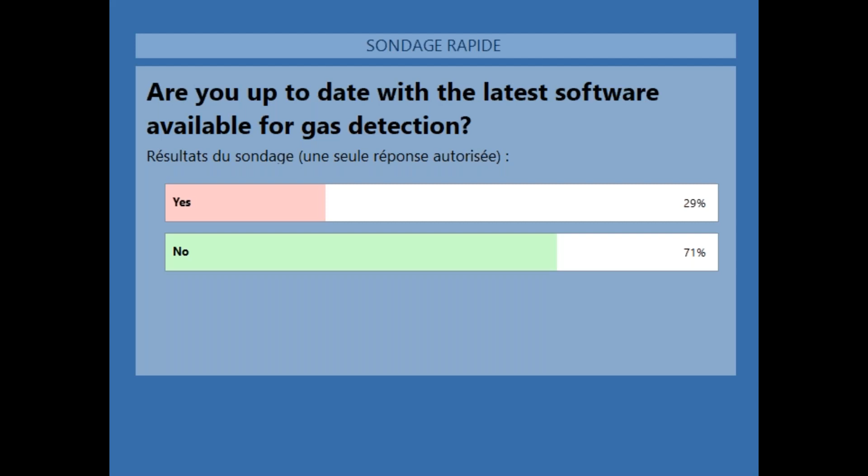A few more seconds. The results are coming. Awesome, very interesting. Almost three-quarters of our audience is not familiar with the latest software available. So you will get the answers today, what's available. Thanks for participating.

So Harry, maybe let's start with how important is gas detection still in industries in 2020? Yeah, the importance is enormous. In the vast majority of industries, workers can be exposed to different contaminants. Gas detection allows us to ensure that normal atmospheric conditions are maintained in the environment in which workers must perform their tasks.

Secondly, to identify the presence of contaminants that cannot be detected by our senses, and also to warn us in case of danger. We could summarize it two different ways: we're concerned mostly with safety and occupational hygiene.

We will see later in this webinar with Matt and Tim the significant evolution in gas detection and in technology. If what surrounds gas detection was not important, it would have stagnated, it would have stood still. On the contrary, we're seeing that this is really not the case. It's really become quite evolved, and something we should all be aware of.

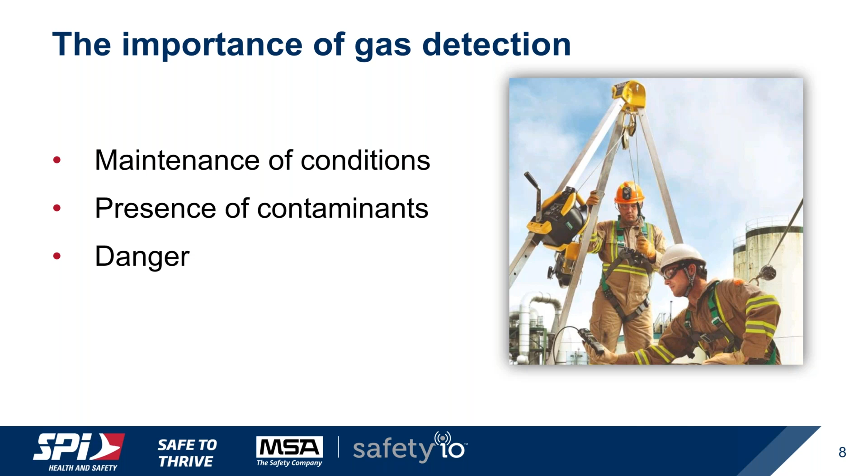On the screen, you can see four of several possible situations where gas detection is used to ensure safety when entering a confined space, which is my expertise, my world. In a specific place where you want to accomplish a task, for example welders or people working in specific areas, you may want to perform gas detection before going into those areas. A hazardous work area where there may be several workers, and you want to protect the other workers as well.

And it's also used to detect leaks. There are many applications where leak detection becomes very important. What I especially want to point out on this slide is that the people who prepare, handle, use, or wear gas detectors must have the necessary qualifications.

You raise a good question here, Harry. According to you, gentlemen, what are the necessary qualifications for the personnel who must use or handle the equipment?

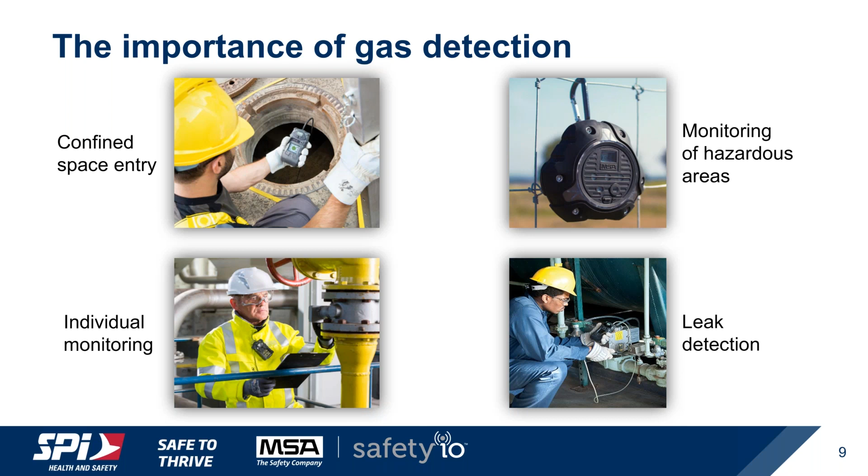But before you go there, we do have another interactive question. I want to know if you, our audience, believe that you have the necessary knowledge to carry out the sampling and correctly interpret the results obtained. We'll give you a few seconds. Very easy answer: yes, no, or I'm not sure.

We'll see the results, it's always interesting. A few more seconds, don't be shy. Yes, no, or I'm not sure.

So, yeah, almost our entire audience is either not sure or not confident they have the necessary knowledge. Glad you're here with us today. So I'll ask you the question again in terms of training, Harry.

When it comes to training, we're talking usually about two different types of users, and therefore two different types of training. First, technical training is mainly applied to people who need to calibrate, verify, modify alarms, repair, or maintain devices. We all want to entrust these tasks to competent staff. This training is often delivered by MSA directly according to specific training programs.

Secondly, applied training mainly targets other types of skills. People who need to use a gas detector to identify, assess, and control hazards should also be qualified. Organizations invest a lot in equipment, but little in the qualifications of the personnel who carry out the testing. So we need to develop the people who actually have to use them, because they want to be able to interpret these numbers and readings.

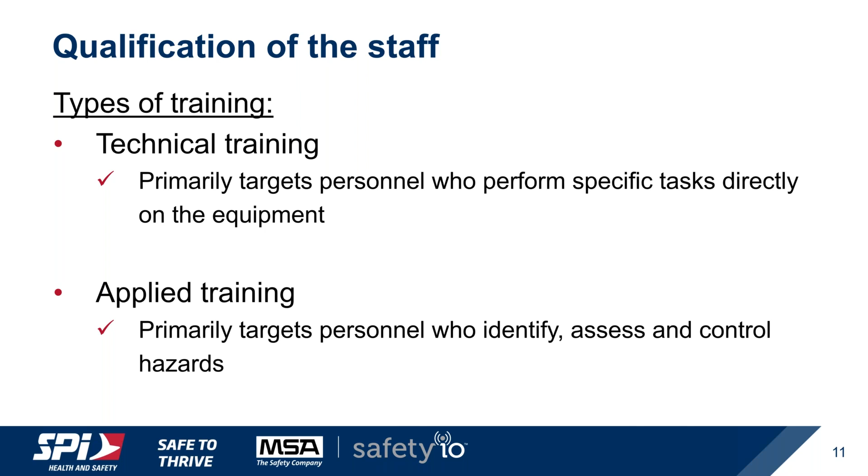So in terms of technical training, Matt, you'll explain what MSA is offering.

Yeah, absolutely. As Harry was referring to, we have competent user training, sometimes called RITE training, designed specifically for the folks who are going to take care of the devices, the detectors, and ensure that they're ready to work.

So what falls into that umbrella? You have bump testing and calibrating the detector, understanding the readings on the actual face of the detector, interpreting the information around the dates that come from the detector and the sensors. What are the different alarm states they might encounter, both around the sensors picking up background gases, as well as other types of things that could drive alarms on the instrument. All of that bundled in with diagnoses, taking apart, reassembling, changing out sensors and displays, all the things you'd want your technical personnel to understand about the detector itself.

And paired with that, we have a component that ties in the software tools they can use to help keep an eye on those things so they won't be in the dark. As those devices are tested, maybe by the folks using them in the field through their calibration stands, they can see that automatically and be more proactive in managing those assets.

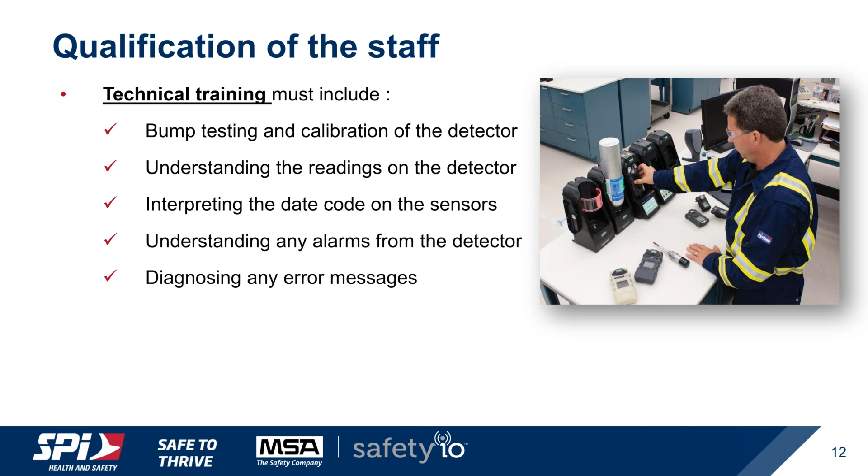And just so you know, at SPI we are an authorized service provider for MSA's product. So we do diagnostics and repairs, calibration, rentals for any gas detectors. In terms of MSA, we're also the authorized provider for the warranty service. So if you need any help or you're unsure, we have a whole department, and that service is provided across Canada. Don't hesitate to reach out.

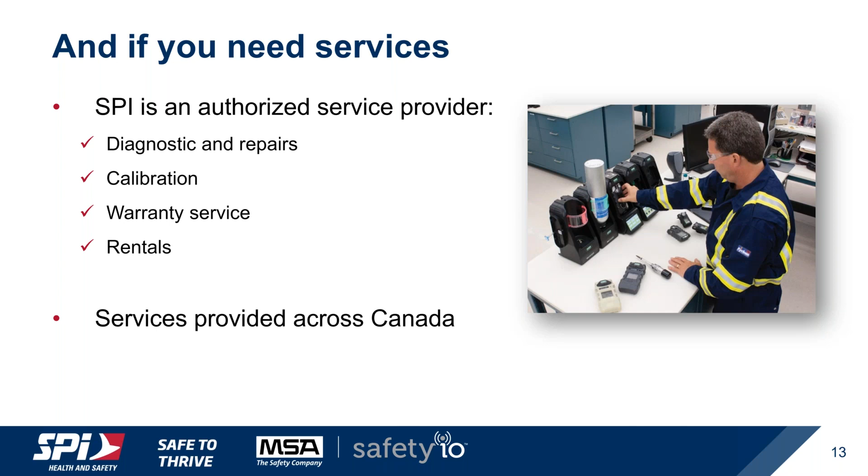So going back to the applied training, Harry, SPI does training as well. Oh yes, we certainly do. From our point of view, the training is essential, and it's aimed at the customers who use the gas detectors. Although it's essential, this training isn't limited to simply knowing the operation, characteristics, and particulars of the instruments used, and whether it's suitable for the gases one wishes to test.

Such as the response time, the time it takes for the instrument to display a correct reading, which we often refer to as the T90. This time is increased if I use a pump with a certain length of tubing, so we're not just waiting 30 seconds - we may have to wait a little more before we have a stable reading.

What is the range of temperature the detector can be used in when you're working in the middle of winter, like in an industrial or municipal situation? There may be some days you just can't use a detector outside.

And it touches on other aspects as well - in particular, the knowledge of atmospheric hazards, understanding the environment to be tested or evaluated, choosing the right devices according to the environment to be sampled is very, very important. The appropriate methods of testing, for example working in top access confined spaces where you have different densities of gases to deal with, or when going horizontal where you may have to reach further into a confined space, so you need to be able to test further in as well.

Then there's the interpretation of the results. This is something a lot of people aren't aware of - sometimes we say, well, as long as the detector doesn't alarm, we're safe. It's not the case. Sometimes when we see certain values appear, even if it doesn't go into alarm, we may want to interpret that as a sign of danger. So we want to be able to understand that.

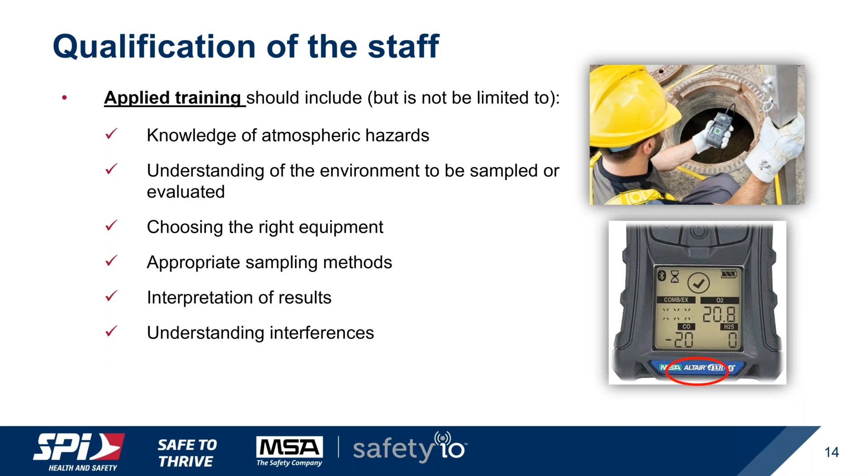That's right. So to facilitate training, MSA offers interesting tools - these are the online simulators. They're also available for some newer models and also for the Galaxy stations, the docking stations. We use these online simulators.

Often users have a fear of using these detectors and devices and navigating the different screens, so they're not too sure how to get through them. They fear maybe altering the device or damaging it. Our consultants and trainers use these online simulators to help our clients, even at a distance.

For example, Fabien was dealing with a client who called in a bit of a panic from all the way up in Fermont in northern Quebec. He was having a challenge with a detector - he needed to be able to bump test and calibrate it, and he was just not getting it done. So with the online simulator, he was able to guide him through it. Within minutes, the guy was able to do it. So yeah, it's a very, very useful tool, this online simulator.

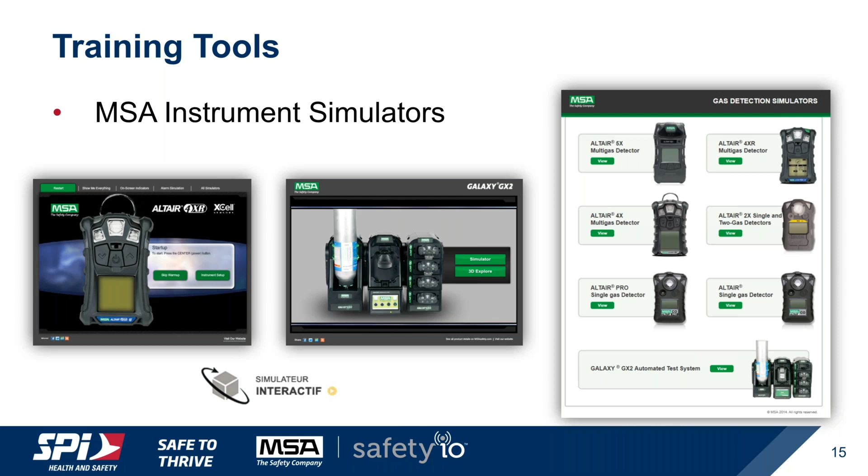Exactly. And finally, the new MSA devices actually do have Bluetooth technology, which opens up a whole new world of possibilities for data control.

Yeah, and beyond the Bluetooth, that's what Tim and Matt are going to talk about as we move on to Industry 4.0. But before we get there, what we're going to be discussing with you, Matt and Tim - correct me if I'm wrong - is you're going to summarize how Industry 4.0 works and basically what are the main challenges for workers' safety in this era. You'll compare it to the evolution of gas detection, as Ari mentioned before, and how the digital transformation and technology is changing workers and industrial safety through the software you're going to be presenting. And obviously how to get started and who to reach out to. So I will let you introduce MSA and Safety IO.

Excellent, thanks. So many of you may know MSA, and I'm sure many of you have yet to be exposed to MSA. MSA is a safety equipment manufacturer that has been around since 1914, and in fact our first big commercial product was co-developed with Thomas Edison in 1914 for the mining industry. MSA has matured considerably since then, and we offer a host of different types of personal protective equipment, as well as infrastructure protection equipment in the gas detection space, as well as head, eye, face, hearing, respiratory, and fall protection. So MSA has been around for a long time in the safety space.

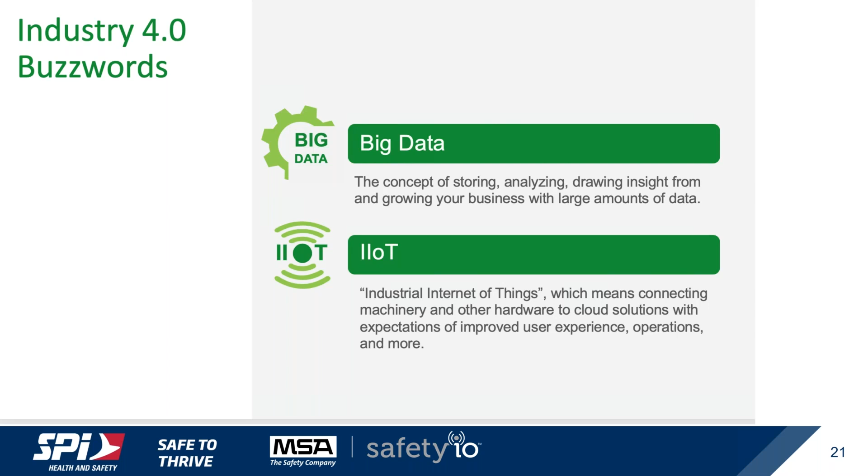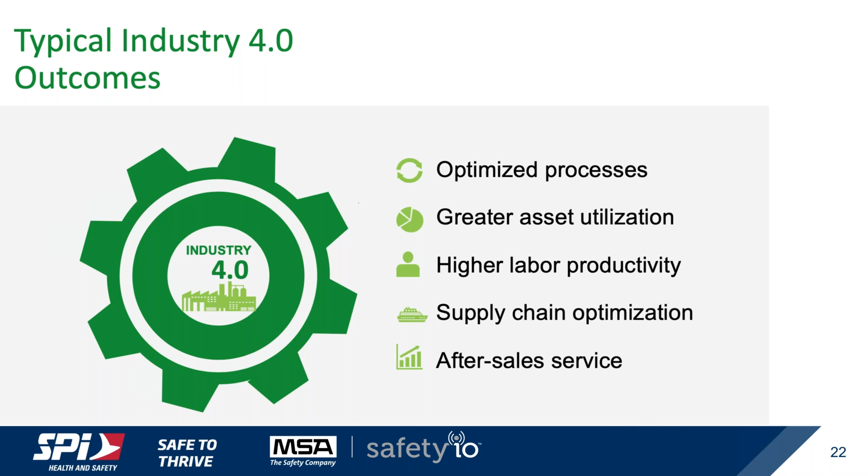So what kind of outcomes is Industry 4.0 providing today, just in general in the industrial space? It's helping companies optimize their processes, better utilize the assets they have, increase labor productivity, optimize their supply chain, and even increase revenue by being able to offer after-sales service. These are most of the common things that we see for any digitalization project today, but improving safety outcomes is starting to gain attention in corporations that have a safety-first culture.

Now, Matt's going to talk a little bit about some of the challenges you may be facing today in your company or in your safety program.

Yeah, thanks, Tim. So, a little bit of a history lesson here. This made me think back to my middle school and high school days in history class, wondering when we would ever use this information. Well, today's the day. If you look back 150 years, the second industrial revolution is when you really saw the introduction of electric power, assembly lines, things like that. At the tail end of that is when the baby boomer generation was really coming to the forefront, being born and growing into their careers.

Now by 19 - yeah, Harry's waving here. Yeah. And in 1970, right on the heels of the baby boomer introduction, you had Gen X, and you also had the third industrial revolution, where you saw the introduction of computers and digital equipment shifting from analog approaches to more digital information. And I am also part of that kind of third industrial revolution in the millennial space, although I'm remiss to admit that sometimes. I am also part of that group. And yes, now, I am too, Matt.

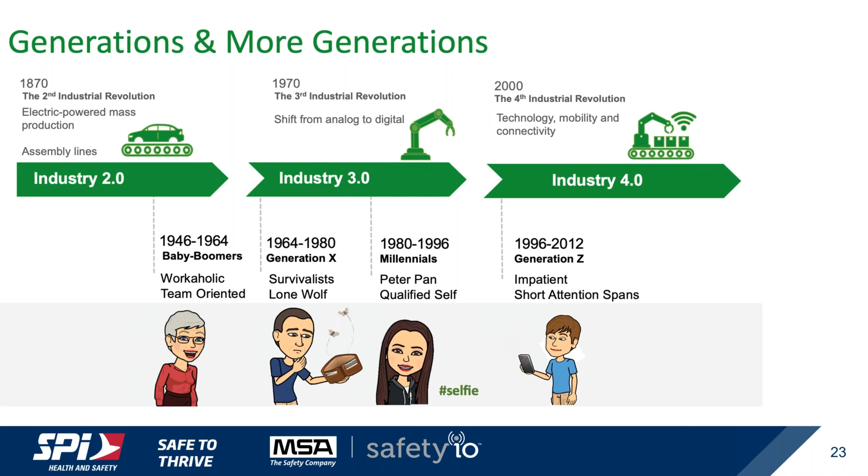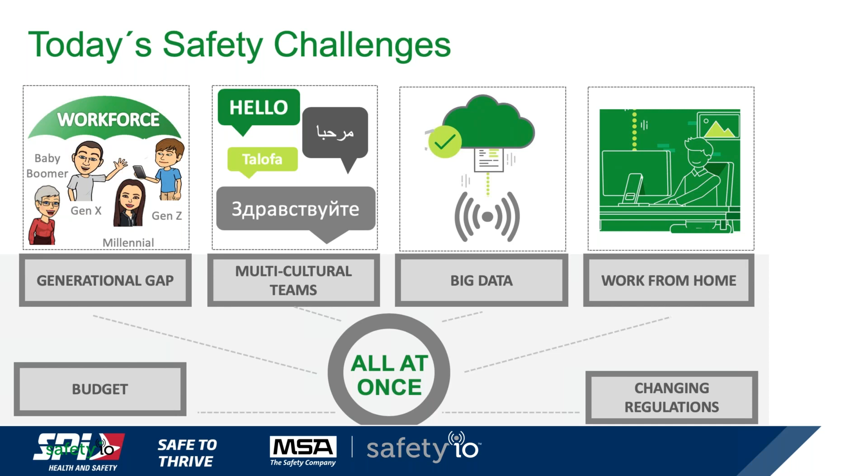So let's expand upon that a little bit more. In addition to the generational gap, what Tim, myself, and the Safety IO team have been learning is that as companies reach around the globe, you have multicultural teams working together. There's an interest in data, even if you're not collecting or organizing it well, there's an interest in acquiring information and figuring out how to put that to work. And a lot of us are faced with a work from home scenario - we were planning to be all together for this webinar, but the pandemic and other situations have limited our ability to do that.

So how do we help people work more effectively from remote locations? With that, I'd like to hand it over to Tim to talk about how we're doing in worker safety. Thanks, Matt.

So how are we doing in worker safety? According to the International Labor Organization, 2.78 million workers die from occupational accidents or work-related diseases, and another 374 million suffer from non-fatal accidents. I don't have to tell you about the impact of these numbers. In addition to the human suffering and loss of life, there's a tremendous economic cost, whether it's absenteeism, lost productivity, poor community relations, or affected stock prices.

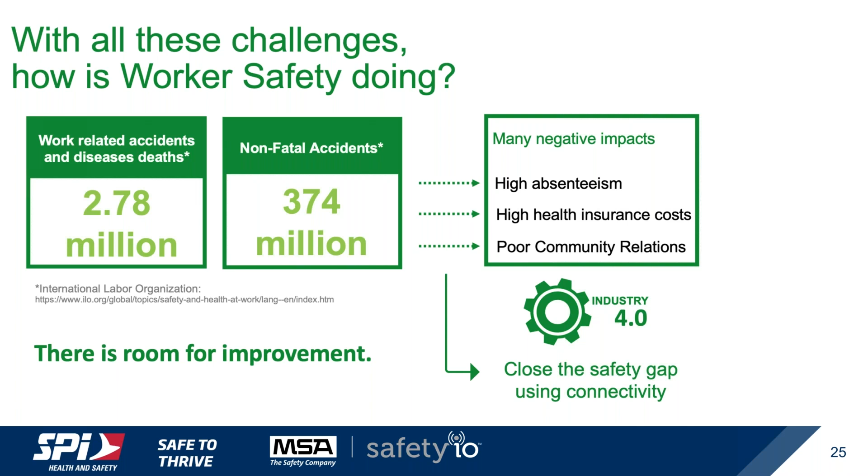Progress has been made in past years in industrial safety, but there's still a lot of room for improvement. As safety professionals, you have to be focused on your biggest safety goal and can't be dependent on clipboards and workers being accountable for themselves necessarily. You're spinning a lot of plates. You need full visibility into worker safety holistically in order to be compliant with safety regulations. Control is key and details do matter.

So that's why you're here today, right? Why learn about Industry 4.0 and why now? Industry 4.0 isn't just about manufacturing efficiencies - it has the potential to improve safety outcomes in your organizations. The insights we're going to get from big data analytics in safety will provide insights to you and to others, and those insights could lead to safety improvements for your workers.

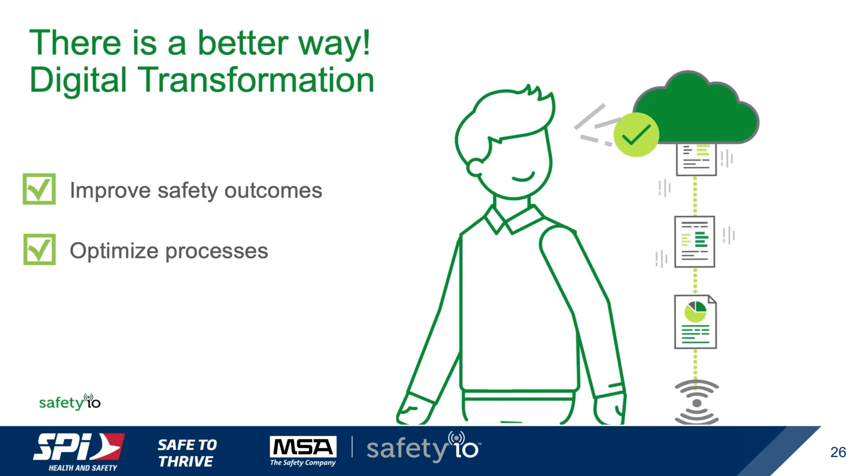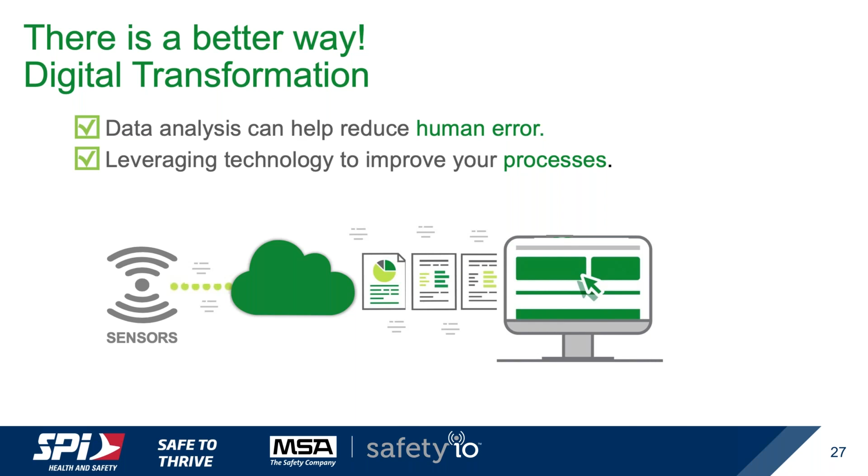So is there a better way to manage these challenges? Yes - we can rely on technology to help us in these spaces. Data analysis can help reduce or eliminate human error and help create a more comprehensive approach to worker safety. Technological advances are really affecting the world in different ways, and when it comes to industries, it's not any different. The insights are going to allow you to improve existing processes and make you more efficient.

Gas detection has also come a long way, and Matt's going to go back and give you another history lesson here in gas detection. Yeah, I'm really putting on my professor hat today, it's a very new interesting place for me. I actually like history now. All right, good.

So as Tim was saying, there are changes happening from a technology and data standpoint all throughout our space. I just wanted to show you how things are progressing and how quickly they're moving along, even just within one kind of niche category in gas detection.

So in the second industrial revolution, you were seeing folks using canaries and other types of winged animals to find hazards before they affected workers down in dangerous places. In the 1920s, MSA launched their first carbon monoxide monitor, and then after that, you started seeing combustible sensors and things like that.

Now, it took until 1950 for the multi-gas detector to come along, which many of us see across the industrial space because they give you so much flexibility and awareness across the four key exposure risks - combustible gases, oxygen, carbon monoxide, and hydrogen sulfide. They became wearable and transitioned from analog to digital during the third industrial revolution, and started integrating logs. So it wasn't just about providing awareness to the person wearing the device, but about what we can learn after an incident or exposure based on what the instrument saw while it was at work.

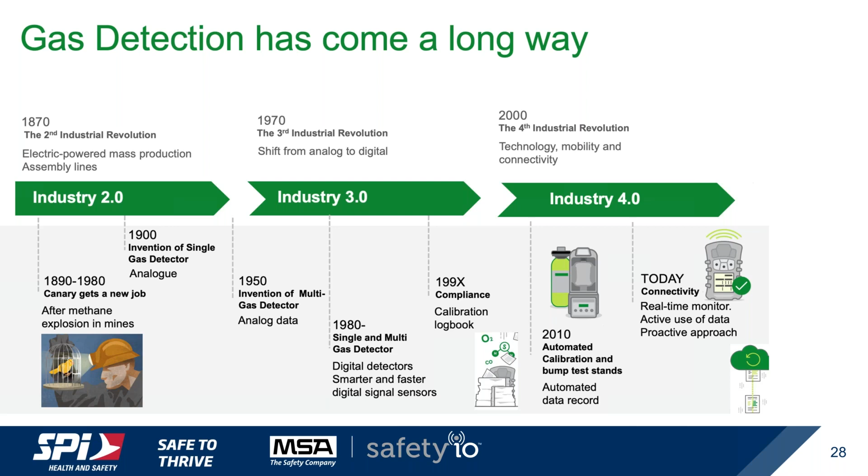So in essence, as Tim has been saying, the devices are becoming smarter, their response time is getting faster, and it's allowing for safer workforces. So progress has certainly been made, but we still believe, based on conversations with people around the world, there's room for improvement.

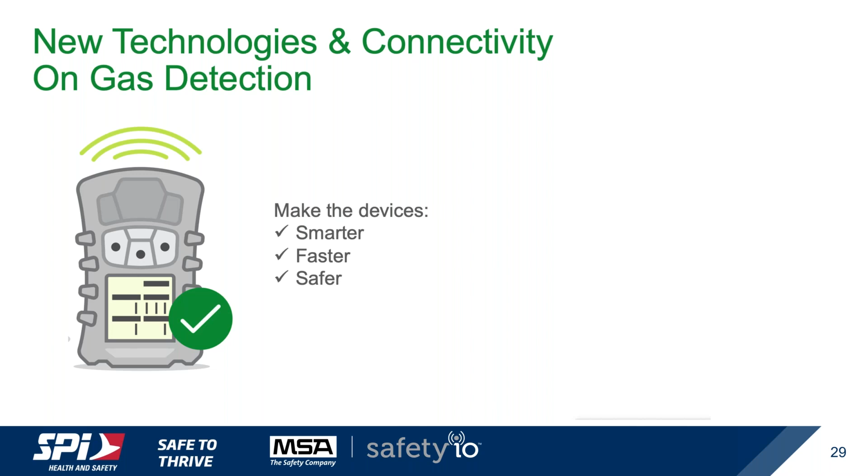Thanks, Matt. What does that journey look like, Tim? Why don't we start off with that? Yeah, so we've given you a lot to think about. We've set the stage, we've talked about a lot of history. Industry 4.0 can be this big nebulous thing, and there's so many different ways you can approach your safety program. So let's dial it back and start the journey. How do you get to where you need to be?

So why does data matter in all of this? When it comes to putting together a compliant safety program, there's really four components here. And I'm going to focus on gas detection because that's where we have a lot of experience, and that's where we're focusing on right now for Industry 4.0.

So the first one: making sure workers have the right protection for their job. Do you know if workers have the right sensors given the gases they're working around? Are you using area monitors in a confined space? How are you even tracking this now? Are you using pen and paper? Are you using spreadsheets? The second one: making sure that equipment is inspected and working properly.

Do you know if your detectors have been bump tested and calibrated? Are all the sensors ready or are they end of life? What about preventative maintenance? If you could be proactive and repair or replace a piece of equipment before it breaks, how much downtime are you going to save?

The third: making sure that the worker is actually using that equipment properly. Are they even turning the detectors on? Are they ignoring gas alarms? Are they pressing the button? Are they turning the detector off when it goes into alarm? Are there sub-alarm exposures happening that you're not even aware of, or that the workers aren't even aware of? And then the fourth piece of compliance is record keeping.

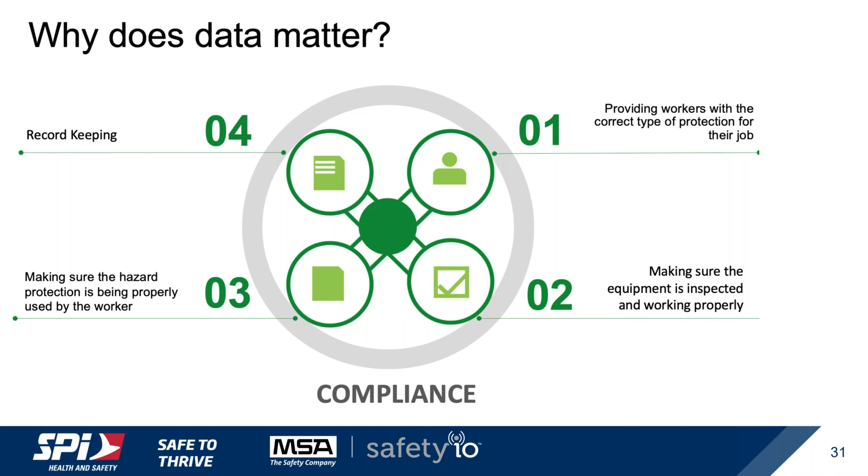And these concepts will allow us to analyze data from the connected devices and be a main driver to ensure accountability across all four of these components. At a minimum, it's going to give you some actionable insights to have a compliant gas detection program. So with all that in mind, how do you get started? What's next? Matt's going to talk about why portable gas detection is a natural starting point for having an Industry 4.0 enabled safety program.

Yeah, exactly. There's not a lot of mystery behind this, especially as we kind of laid out the story. When you look at a gas detector, it's a piece of electronic equipment. It's capable of recording information. It plays a really important role in workplace safety and worker safety, as well as the work sites, the scenarios that Harry was describing earlier. There you have and offer relatively easy connectivity, whether it's through the test stands in certain scenarios or directly from the devices themselves. They don't require a lot of extra tools or capabilities in order to establish that easy connection.

Number three, especially if you're testing the devices with regularity, maintaining compliance around calibrations and things like that, the data that's harvested will be accurate. Now, like Harry was saying, there are going to be certain interferences that may affect the readings, but wouldn't you rather know what's happening so you can learn over time what might be going on and troubleshoot those things rather than handling them one-by-one and never having a chance to learn from them? And number four goes hand in hand with number three: the data is there, it's available to you, but it may not have been easy to access in the past. So the convenience factor is there now too.

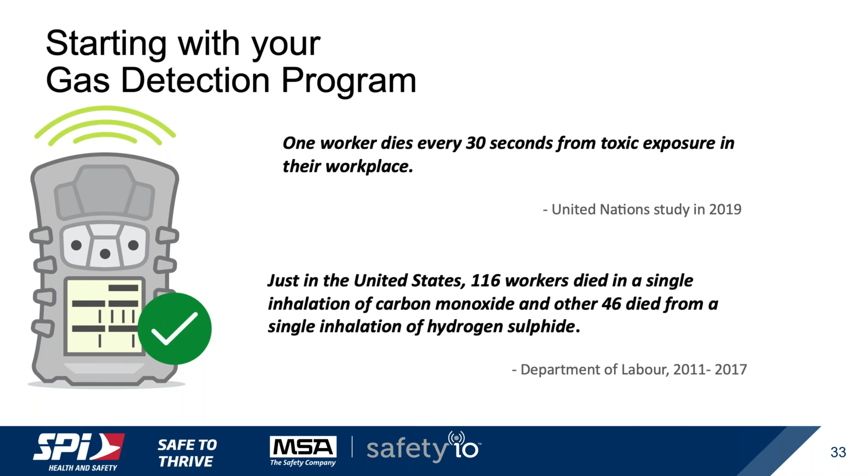All right, so as an EHS manager, as a safety manager, as an industrial hygienist, how do you help your company transform from an industry 3.0 focus to an industry 4.0 type of attitude?

Number one, you want to get organizational buy-in. And this doesn't mean that everybody has to come along with you, right? You want to find key champions in your organization, people you trust, people who understand the value of transforming a safety program. Find an executive champion or a director level champion.

Find someone in the IT organization. IT has transitioned dramatically over the past 10, 15 years from a no cloud, never ever, locally hosted data only approach, to realizing we really should be leveraging these cloud computing and storage capabilities. And so they get it. Many of these IT organizations we work with have been through these changes already.

And there's a perception in many cases within safety management, plant management, and procurement that, oh boy, don't talk about cloud, we're not allowed cloud. But then as soon as you bring the IT team to the table, they're like, wait a second, we can totally do this.